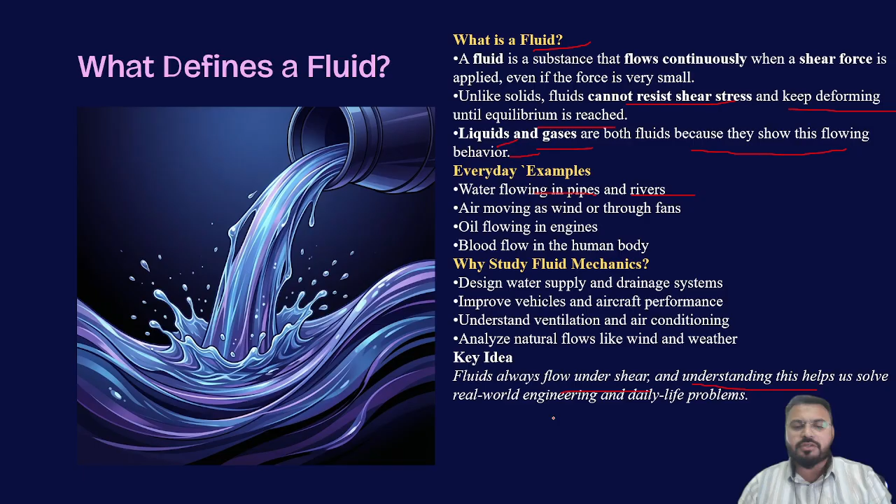So the key takeaway or the key idea is fluid always flows under shear, and its understanding helps us to solve real world engineering and day-to-day life problems.

Now classification of fluids. The fluids are basically classified in four types, that is ideal fluid, real fluid, Newtonian fluid and non-Newtonian fluid. The name itself suggests ideal fluids are ideal. They have zero viscosity, they are incompressible, they are frictionless. But it is a theoretical concept, only used for simplifying the analysis.

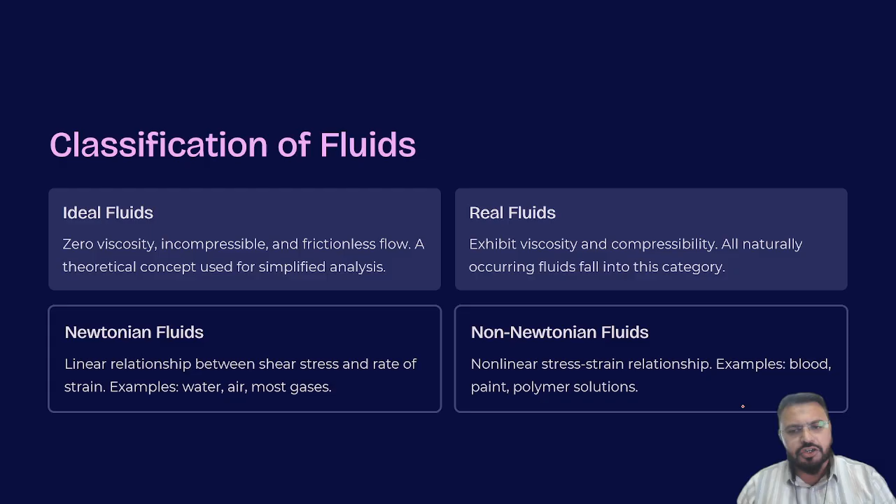Real fluids exhibit all the properties like viscosity and compressibility, and all the naturally occurring fluids belong to this category. Newtonian fluids exhibit a linear relationship between shear stress and rate of strain, for example water, air and most of the gases. Whereas non-Newtonian fluids exhibit non-linear shear stress relationships, for example blood, paints, polymer solutions.

Now what is the continuum hypothesis? Though it is a hypothesis, it is very important to understand. In this hypothesis, fluids are treated as a continuous media and not as individual molecules. This allows properties like density, pressure, velocity and temperature to be defined at every point in the fluid.

It makes possible the use of differential equations for fluid flow analysis. It is valid when the characteristic length of the flow is much larger than the mean free path of the molecules. Examples of valid cases are water flowing in a pipe, air flowing over aircraft wings, river and canal flows, and air ventilation in rooms. The limitations are high altitude gas flows and micro or nanoscale flows.

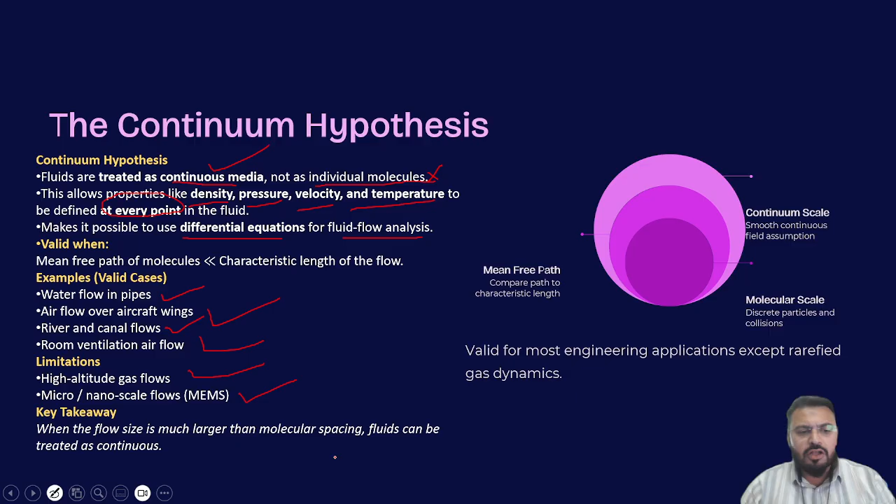So the key takeaway is when the flow size is much larger than the molecular spacing, fluids can be treated as a continuous medium.

Now what are the key properties of the fluid? The first and foremost key property of the fluid is density. Density, we all know, is mass per unit volume. It is indicated by rho. It is measured in kilogram per m cube. It is very critical for understanding the concept of buoyancy and pressure calculation.

Specific weight: weight per unit volume. It is denoted by gamma. Gamma is equal to rho into g. It is measured in Newton per m cube. It is used for hydrostatic pressure analysis.

Specific gravity: it is the ratio of fluid density to reference density, meaning rho of the fluid to the rho of the reference fluid. It is dimensionless in nature. For calculation purposes, the reference is taken as water at 4 degrees centigrade.

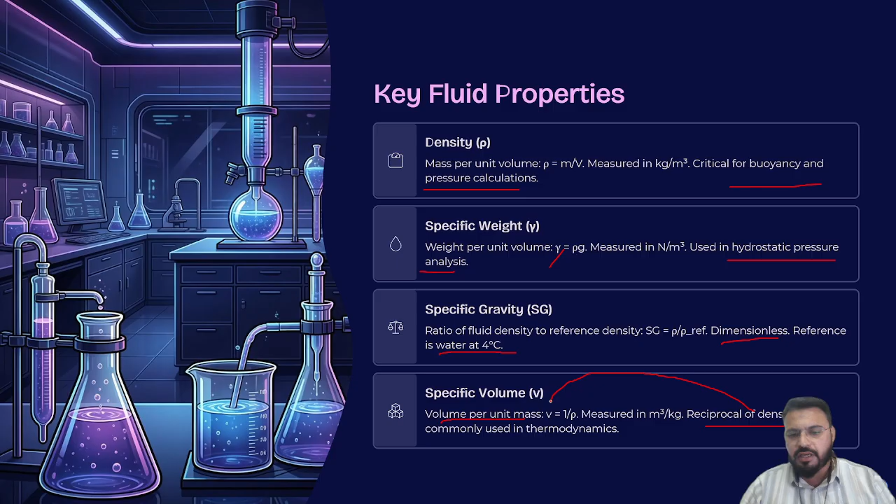Specific volume: volume per unit mass. It is 1 upon rho. It is measured in m cube upon kg. It is the reciprocal of density, as we can see from the mathematical expression. It is commonly used in thermodynamics.

Now understanding viscosity. What is viscosity? Viscosity is the resistance of one fluid layer over another layer. Viscosity quantifies fluid resistance to flow and internal friction between fluid layers moving at different velocities. Viscosities are of two types: dynamic viscosity mu and kinematic viscosity nu.

So dynamic viscosity relates shear stress to the velocity gradient. It is expressed as tau is equal to mu du by dy, where tau is the shear stress and du by dy, which is a partial derivative, is the velocity gradient. Its unit is Newton second per meter square or Pascal second.

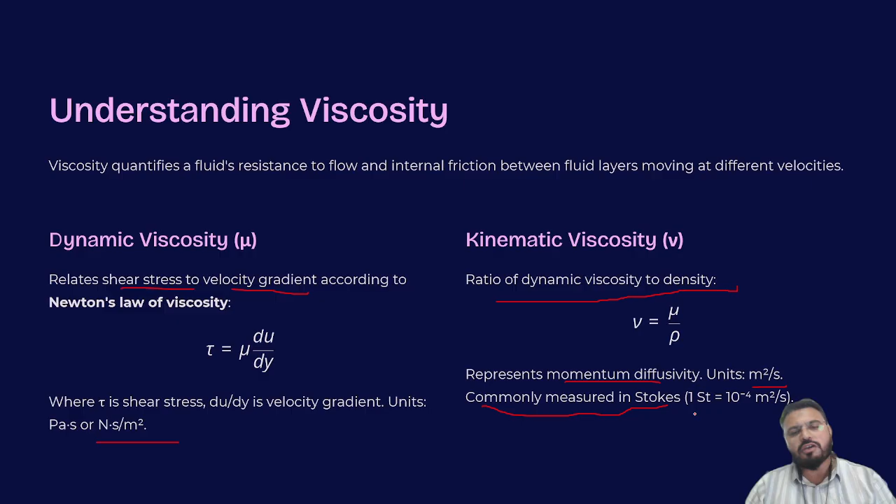Kinematic viscosity nu is the ratio of dynamic viscosity to density. So nu is mu upon rho. It represents momentum diffusivity. Its unit is meter square per second, commonly measured in stokes. One stoke is equal to 10 raised to minus 4 meter square per second.

Now viscosity and temperature, what is the relation? For liquids, viscosity decreases as temperature increases. Why? Because molecular bonds weaken, which reduces resistance to flow. For example, honey flows easier when it is heated. That is the reason we have to change the engine oil in time, because with continuous heating and cooling it loses its viscosity.

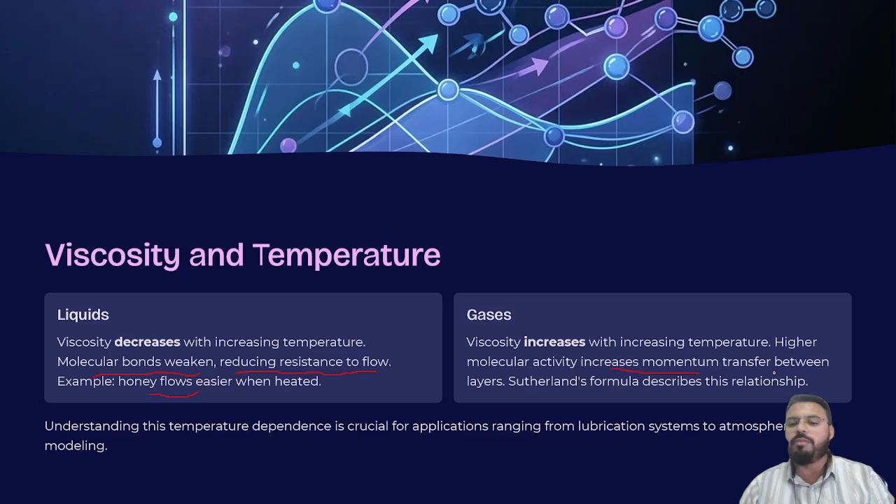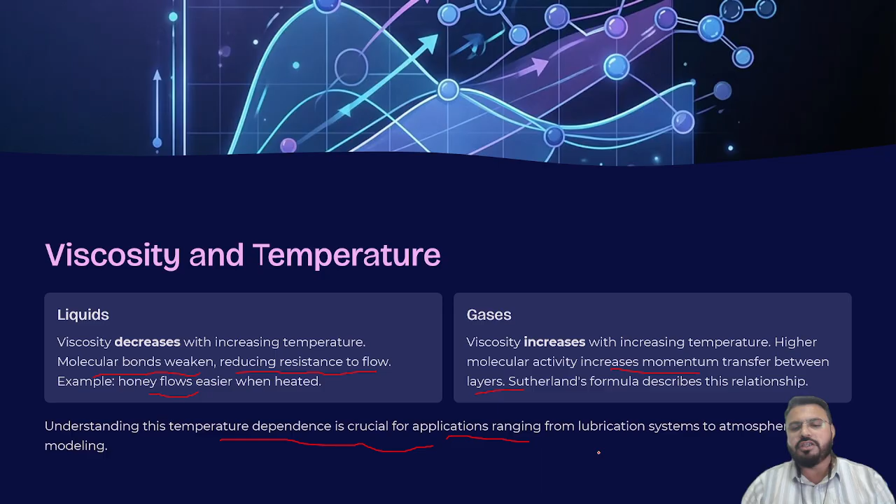Whereas in gases, viscosity increases with increasing temperature. Higher molecular activity increases momentum transfer between the layers. Sutherland's formula describes this relationship. Understanding this temperature dependence is crucial for applications ranging from lubrication systems to atmospheric modeling.

Now what is surface tension and capillarity? Surface tension arises from cohesive forces between molecules at a liquid-gas interface. Measured in Newton per meter, it causes liquids to minimize their surface area.

Capillarity is the rise or fall of a liquid in narrow tubes due to the balance between surface tension and gravitational forces. It is mathematically expressed as h is equal to 2 sigma cos theta upon rho g r, where theta is the contact angle and r is the tube radius. It is very critical in porous media flow and microfluidics.